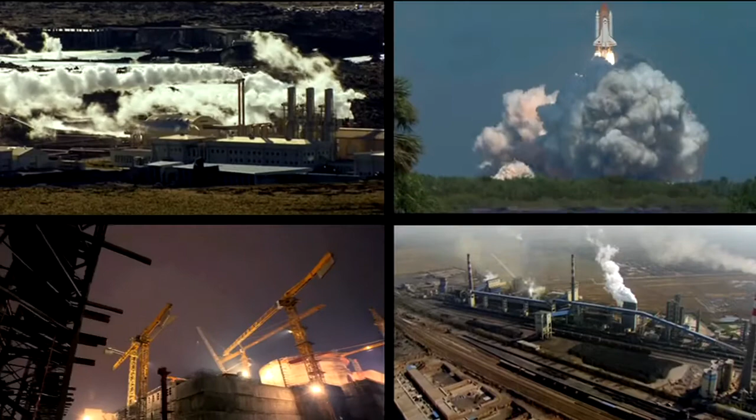We are living in the era of great changes. The power of the human mind has made our life more comfortable, shortened distances, and opened up new horizons. But for the global industry, our era is the time of great challenges.

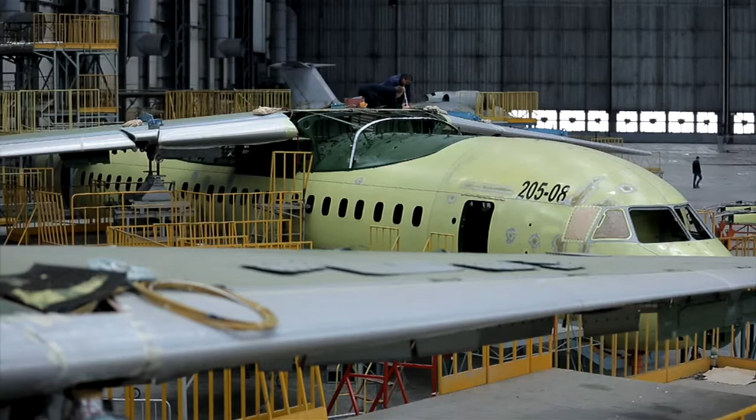The airplane is the fastest and most expensive means of transport. Since the advent of the first aircraft, designers have been working to reduce its weight and make it more reliable, and so reduce the cost of each kilogram carried by air.

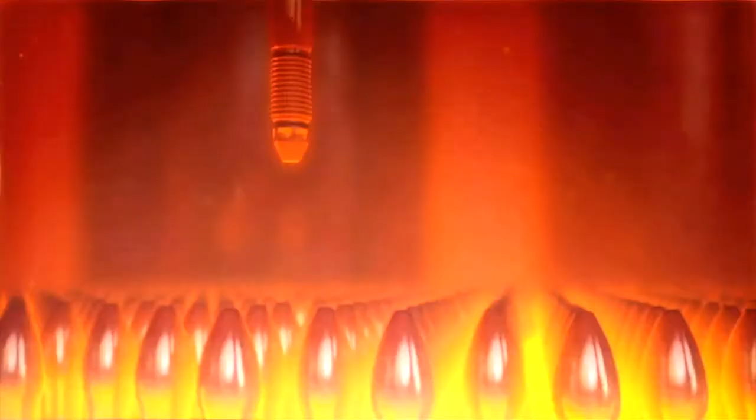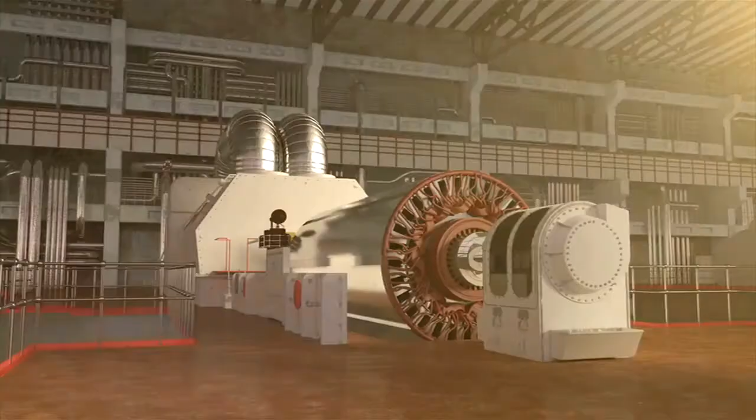Nuclear power is the most promising and cheapest way of generating electric power. However, each structural element of a nuclear reactor operates under conditions of overload and ultra-high temperatures. Extension of their service life and enhancement of their reliability and safety are the main tasks for engineers.

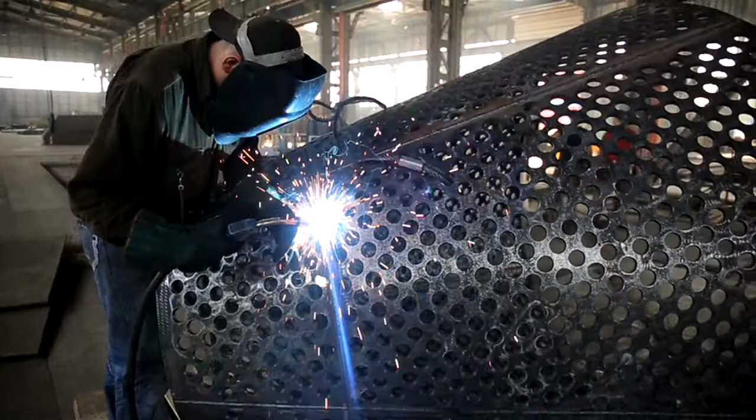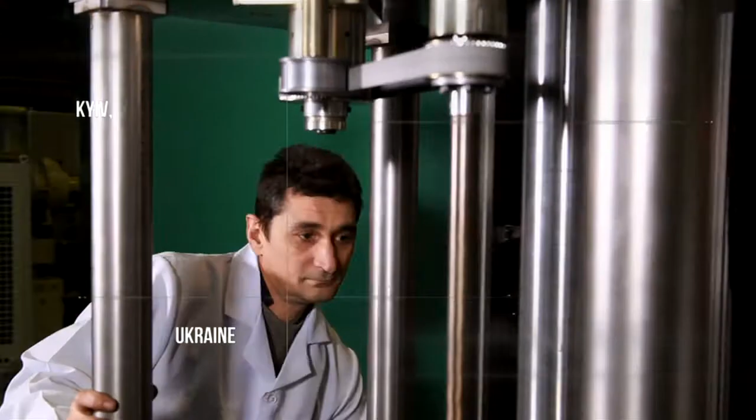Thus, technical progress is impossible without new materials and their new unique properties: ultra-lightness, ultra-strength, and heat resistance. However, the introduction of new materials requires new progressive techniques of their connection. For over 70 years, this field of research has been developed here at the Patton Research Institute of Electric Welding.

The institute was founded in 1934. It employs 3,500 staff. The Paton Institute has sold more than 150 licenses to the United States, Germany, Japan, Russia, Sweden, France, China, and other countries worldwide. Structurally, the institute comprises an experimental design and engineering bureau, pilot production facilities, 3 pilot plants, and more than a dozen engineering centers.

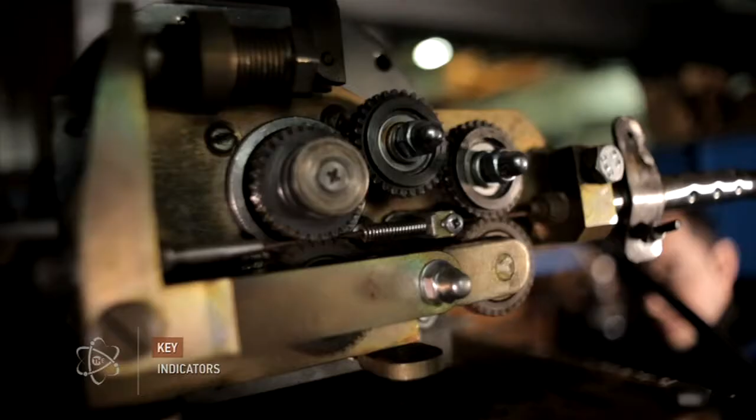The technologies developed by the Patton Institute have served as prerequisites for successful implementation of many audacious global projects, such as forced gasification across the USSR, the world's most powerful weapon, the Satan ballistic missile, continuous welded rail tracks allowing trains to move at 500 km per hour, semi-automatic underwater welding, and welding in the outer space.

Notably, the Patton Institute was one of the originators of electron beam welding, the technology without which nuclear power engineering and modern aircraft, rocket, and engine building industries would be impossible.

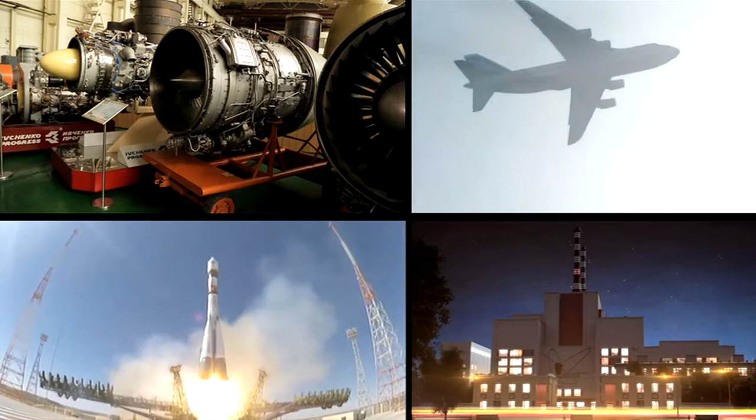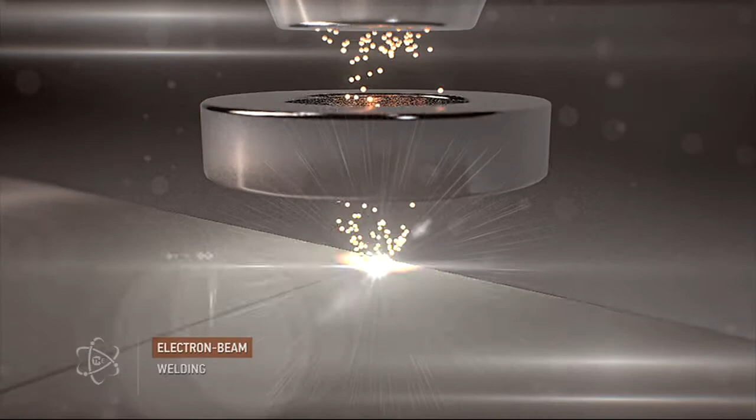How does it work? Electrons are focused into a tight beam and accelerated to ultra-high speeds. When they hit the surface, their kinetic energy is converted into heat, and so metal is heated to high temperatures. As a result, the weld is characterized by large depth and small width.

Electron beam welding ensures reliable connection of refractory, chemically active, and dissimilar steels, as well as high-strength aluminum and titanium-based alloys. Unlike arc welding, this method reduces energy consumption by 10 to 15 times and the fusion area by 25 times.

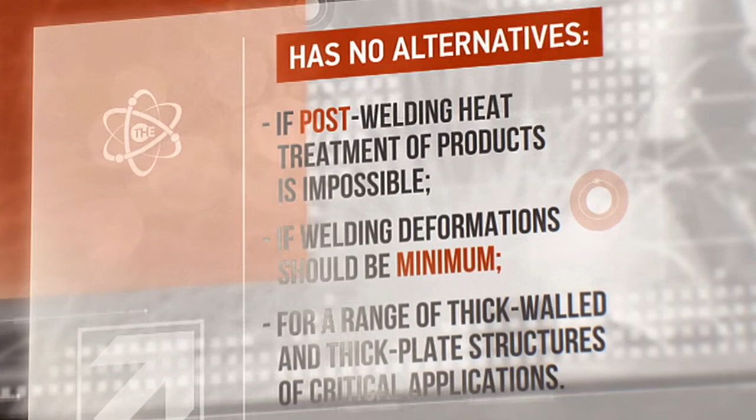Electron beam welding has no alternative if post-welding heat treatment of products is impossible, if welding deformations should be minimal, and for a range of thick-walled and thick-plate structures of critical applications. Making the most of its powerful scientific potential, the Patton Institute develops unique technologies with due regard for individual customers' requirements. Here are just a few examples.

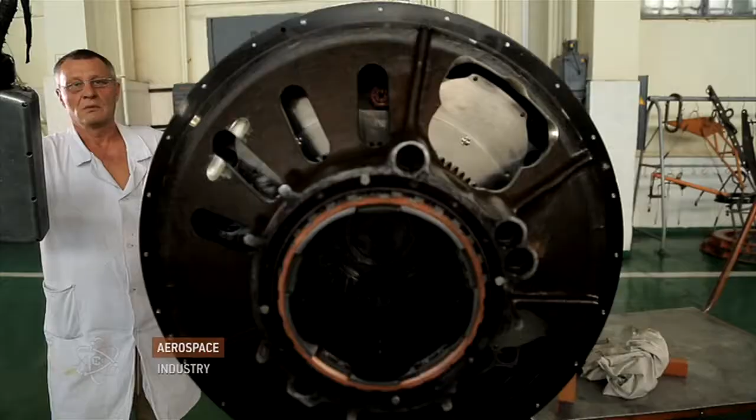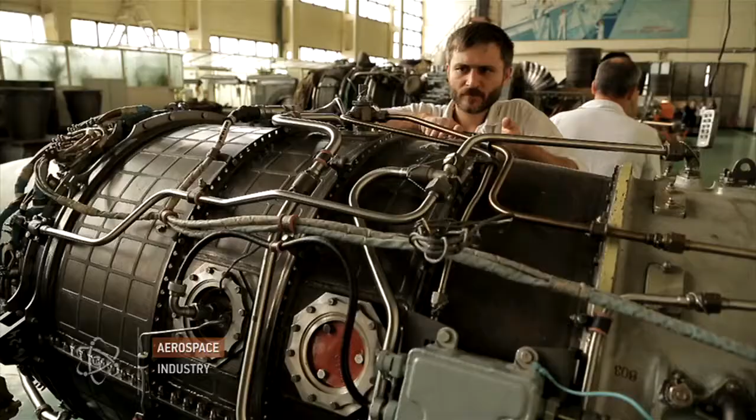The engine is the heart of an aircraft. The manufacturers that offer more economical and more powerful engines win the market. The hotter the gas fed to the turbine, the better these parameters. For this reason, joint connections have to withstand extremely high temperatures.

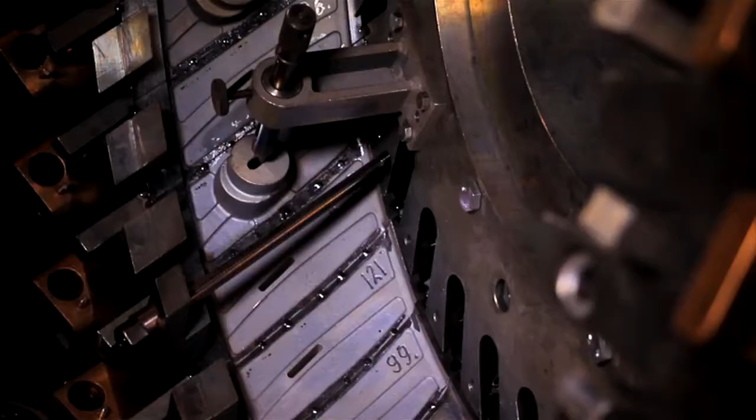In 2014, Patton scientists developed a method to weld the outer part of the casing of the aircraft engine's front intermediate pressure compressor. The customer was Motor Sich, one of the world's leading engine manufacturers. The material was VT5L titanium alloy. Previously, the unit had a cast design, which resulted in high production costs and unstable quality.

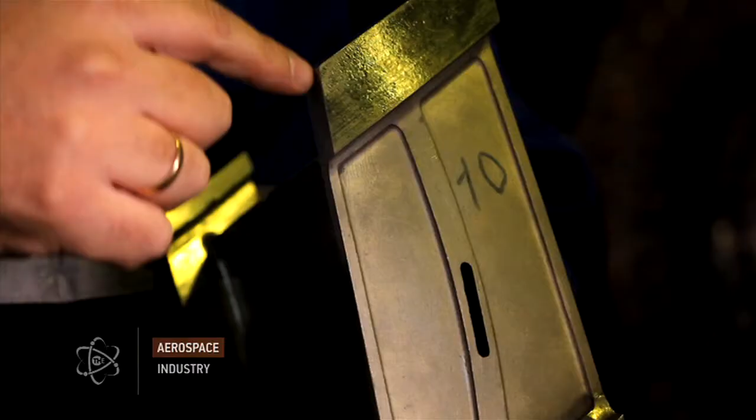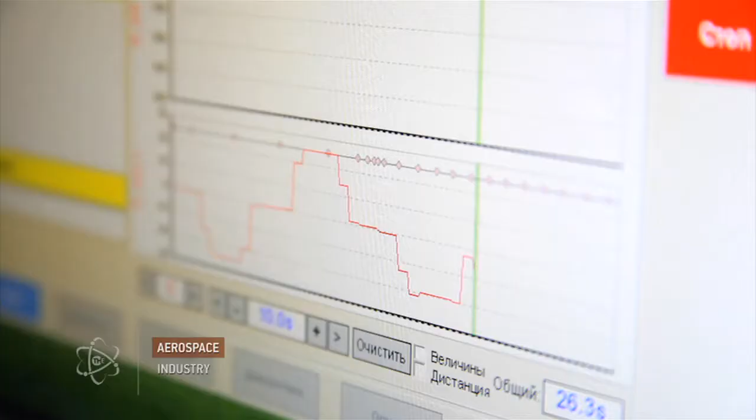The developers faced 2 problems while making the welded structure. 1. Geometrically, the joint was a variable cross-section. 2. The through penetration weld had to be 5 to 25 mm thick and made in one run. Scientists of the Patton Institute found effective solutions to both problems. The process is entirely controlled by special software, and the welding program excludes an operator. The welding factor of joints conforms to the strength factor of the metal body.

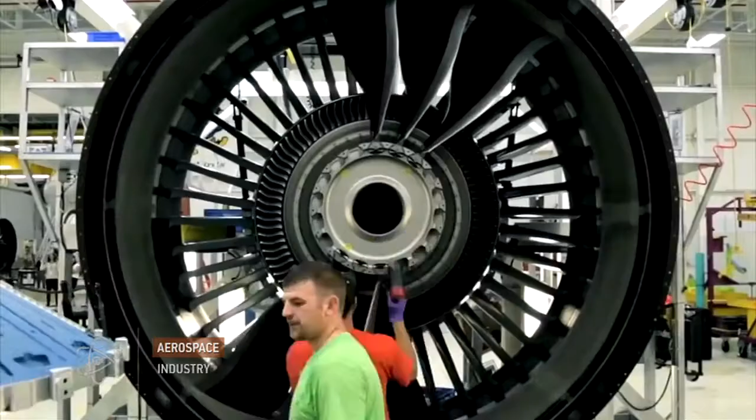The main part of an aircraft engine turbine, the rotating blade, bears the brunt of the heat. The engine's operation fully depends on its strength. And this is about flight safety. The Paton Institute has developed a method to restore damaged blades by welding in triangular inserts. The customer was Motor Sich, and the material was VT titanium alloy.

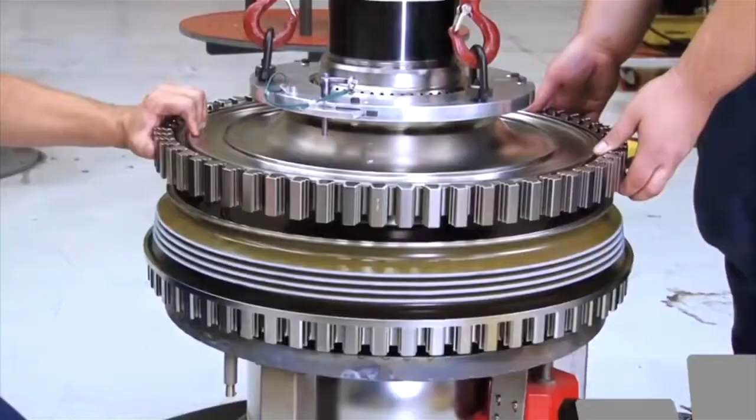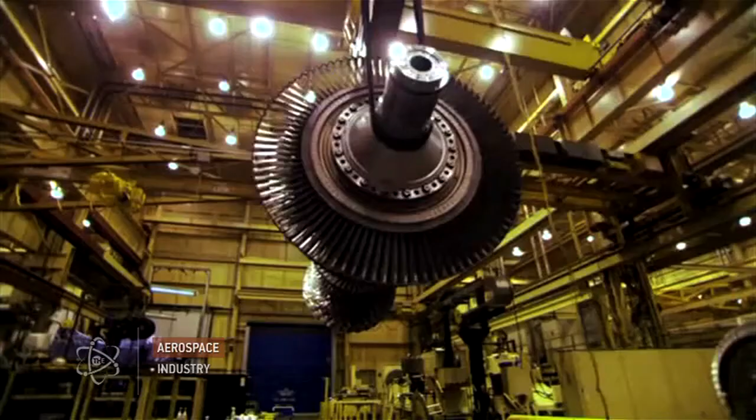One rotating blade costs tens of thousands of euros, and an engine has a multitude of them. Our technology provides for the service life extension of this part by several times. The economic effect is obvious. Currently, a pilot batch of restored blades is undergoing strength tests. After their completion, the method will be applied at the customer's production facilities.

We have developed an electron beam welding method for high-pressure spherical balloons of spacecraft. The customer is the Space Agency of the Republic of India, and the material is VT6 titanium alloy. As compared with argon arc welding, this method minimizes welding deformations, post-welding mechanical treatment, and weld spatter inside a spherical balloon.

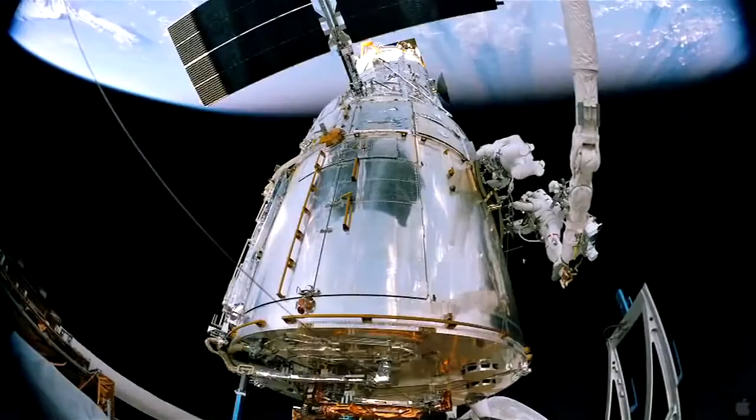Experts believe that the future of the aerospace industry belongs to magnesium alloys, one of the lightest and at the same time one of the most durable types of materials.

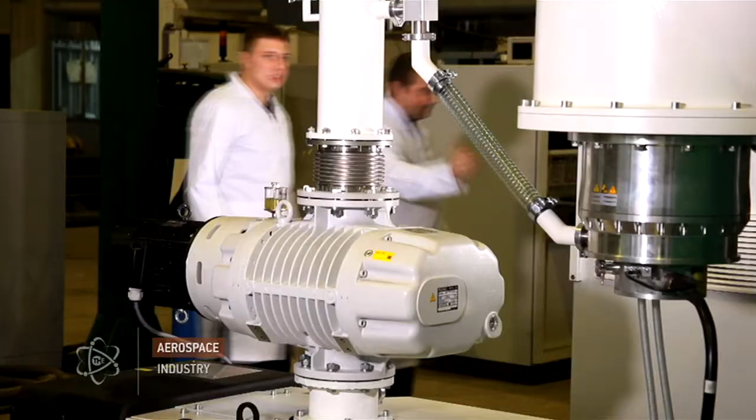However, the introduction of magnesium alloys on a large scale has so far been hindered by imperfect connection techniques. The Paton Institute has developed a hybrid technique for connecting this material. The first stage is friction welding, and the next stage is electron beam welding. Thanks to pretreatment of welded edges by friction stir, cracks and other defects are avoided, and welded joints become almost twice stronger, with their plasticity and impact resistance enhanced as well.

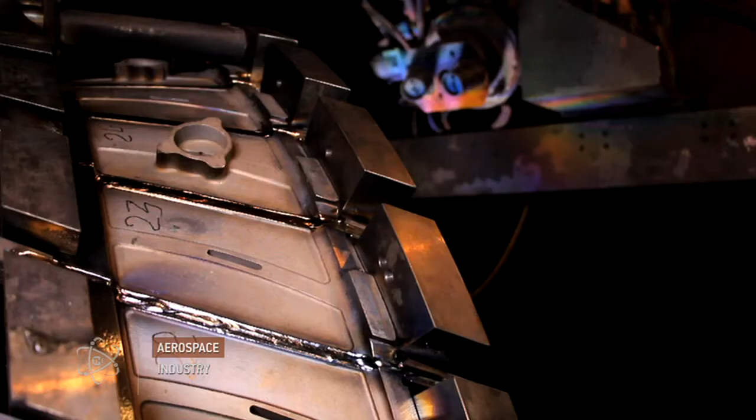This technology has been developed for rehabilitation of intermediate casings of aircraft engines by welding in a 6 mm thick rectangular insert in the damaged area.

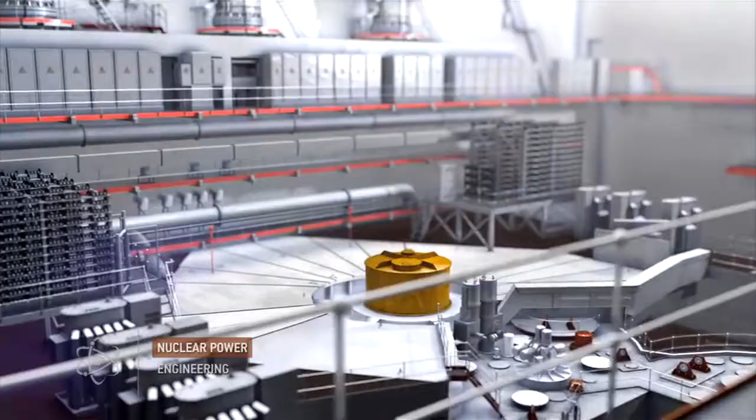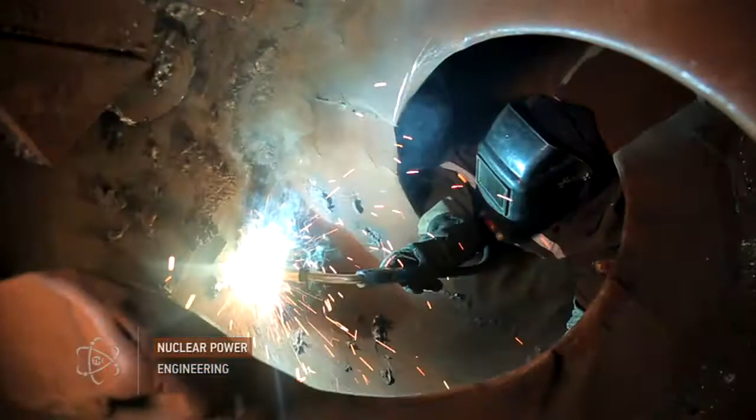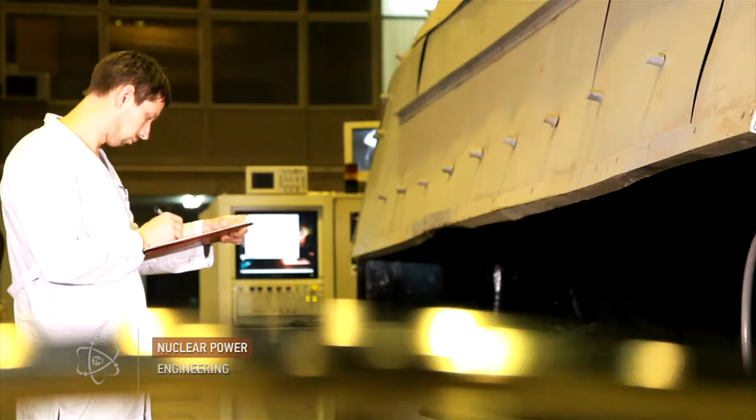One of the most challenging aspects of the global energy industry is reliable connection of thick-walled structures like walls of a nuclear reactor. At present, walls thicker than 40 mm are connected by a multi-layer weld, which sometimes takes up to 100 runs. This technique requires multi-step preparation and significantly increases the likelihood of weld defects, which subsequently affects quality and performance. The Paton Institute has developed a new technique to solve this problem.

The customer is the Russian public holding company Izhorsky Zavody, the only CIS manufacturer of equipment for reactors of the so-termed nuclear island, as well as for reactors of the petrochemical industry. The material is chrome molybdenum steels. Owing to 90 kilowatt beam power, materials up to 200 mm thick can be welded together in one run. This is a unique achievement, yet unsurpassed by any manufacturer of welding equipment.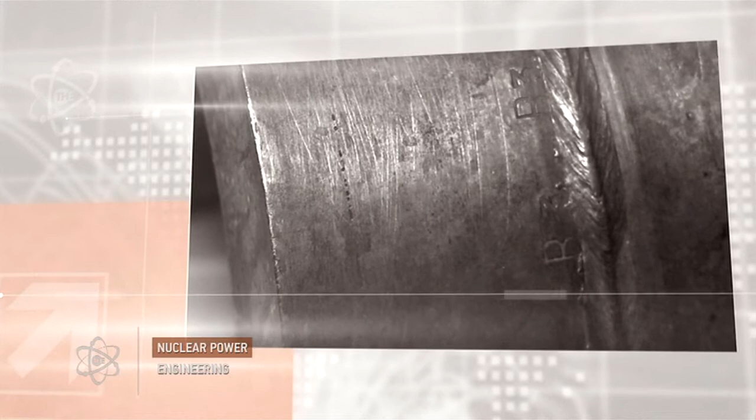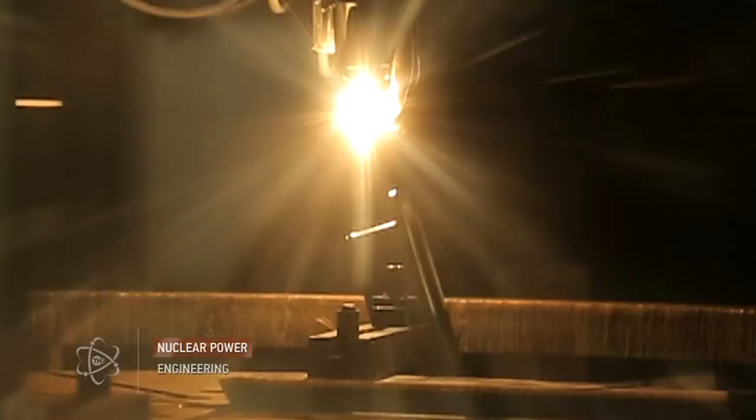Comprehensive studies have confirmed that the weld is as strong as the metal body. Using this method, the customer is able to skip several preparatory stages and cut the time of welding by several times, thus significantly improving weld joint quality and increasing productivity.

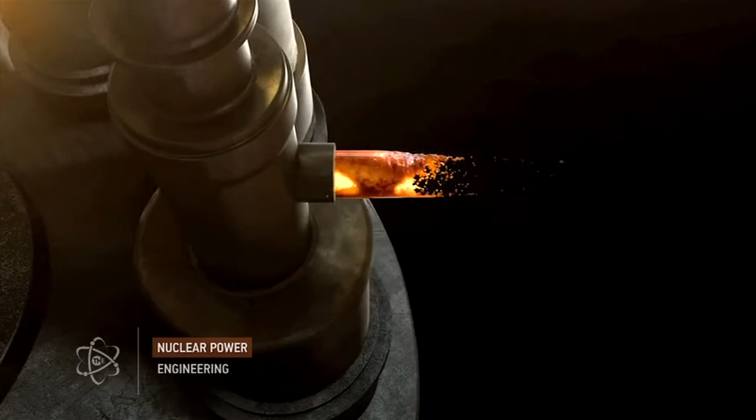A heat exchange unit is the key element of a nuclear reactor. Because of colossal pressure in the tubes reaching 10 megapascals, water does not boil at 270 degrees centigrade. High radiation adds to the most extreme wear conditions.

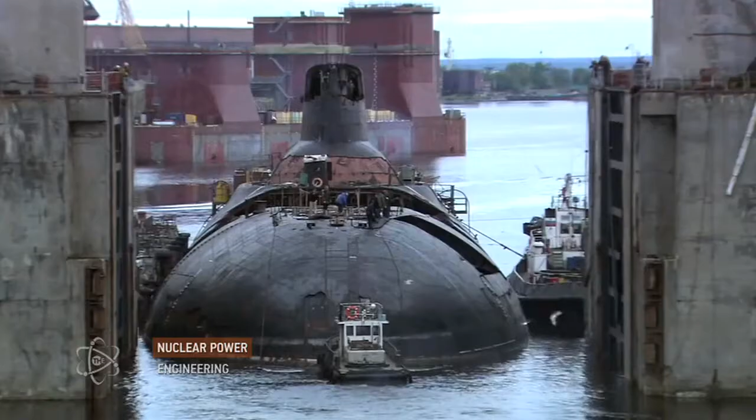The Paton Institute has developed an electron beam welding method to connect the heat exchanger walls with multiple tubes. Unlike traditional argon arc welding, this method doubles the penetration depth and the unit's service life. The welding proceeds automatically according to a preset program. This method has been successfully applied in the construction of nuclear-powered vessels.

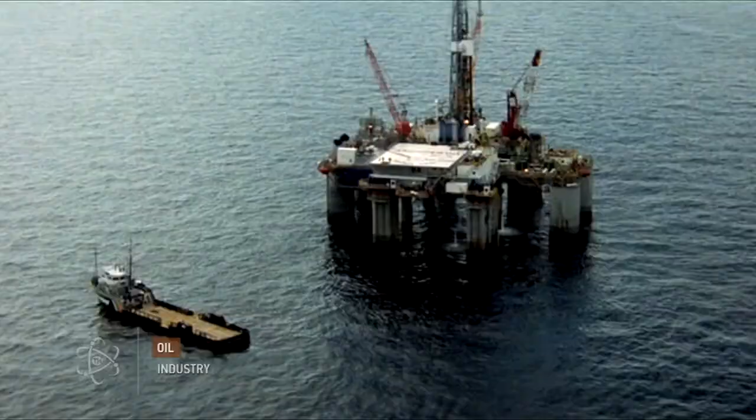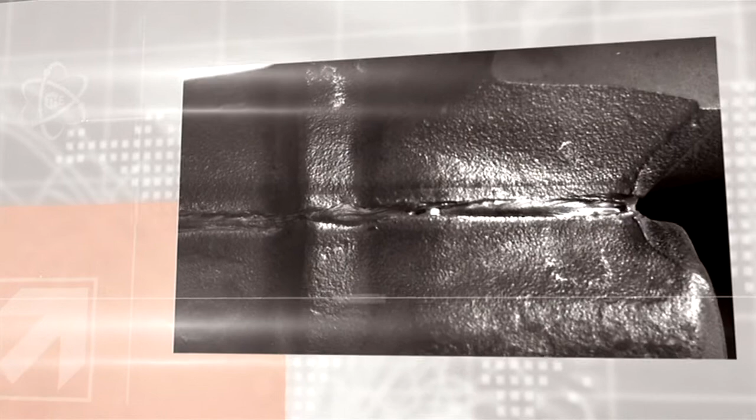The energy crisis forces humankind to search for and develop new oil and gas fields, and here the main task for engineers is to extend the service life of drill bits. They consist of 3 vertical case segments made from medium alloy high-strength steel. The traditional method of successive welds did not allow for the regular geometric shape of the drilling bit. As a result, its service life and performance characteristics reduced.

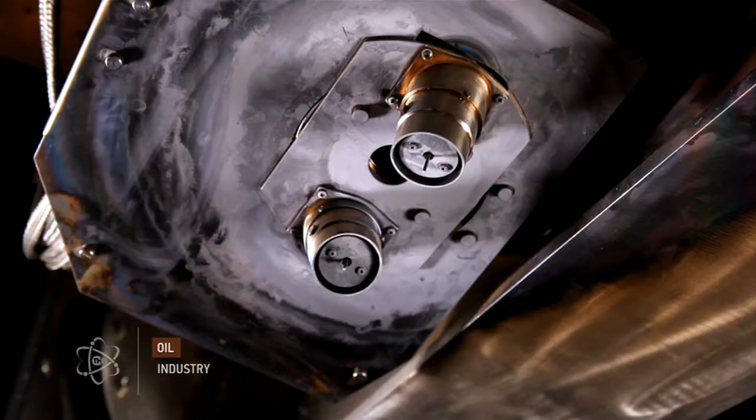The Paton Institute has developed a method of simultaneous 3-joint welding by 3 guns. As a result, output capacity has increased to 5 items per hour. Using this method, the customers have not only increased their outputs by several times, but have also increased considerably the end product's economic efficiency. This technology has been successfully applied at Chinese factories for more than 5 years, allowing them to put out products with higher added value.

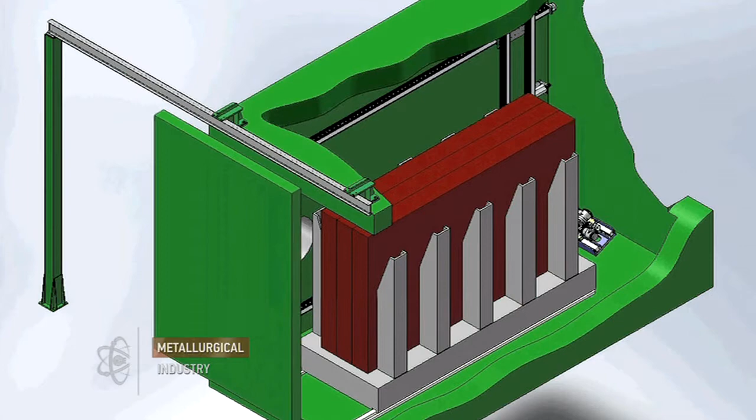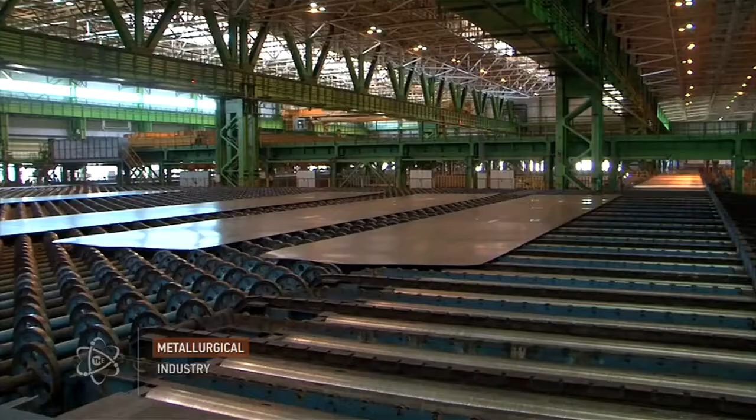Scientists of the Paton Institute have developed a slab connection method for the metallurgical industry. The customers, a pool of integrated iron and steel works in China, needed to increase the thickness of their slabs from 20 to 40 millimeters. However, they were limited by the rolling mill's capacity. Traditional welding methods did not allow them to obtain homogeneous material because of cavities with air forming inside.

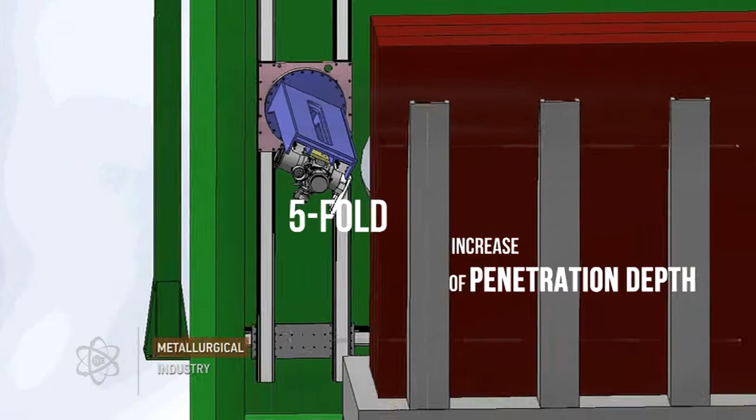Electron beam welding takes place in vacuum. At the same time, penetration is 5 times deeper than in arc welding. This ensures homogeneity of metal during subsequent rolling and the output capacity of 1 item per hour.

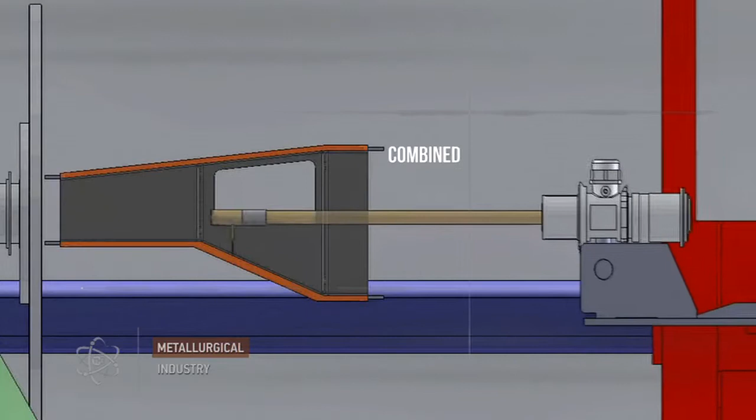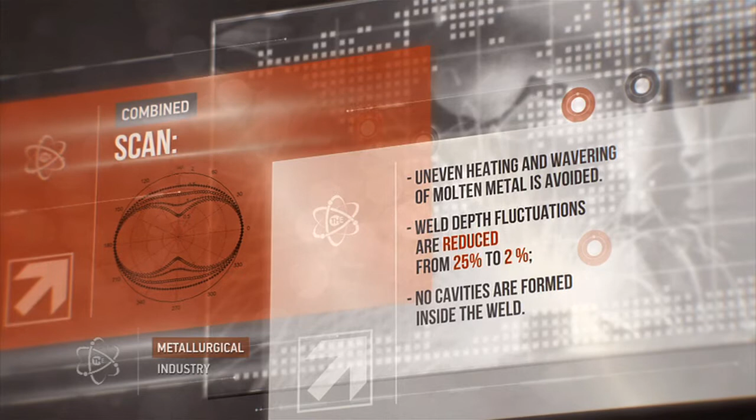The Paton Institute successfully applies combined electron beam scanning: wave, circular, etc. This helps to avoid uneven heating and ripple of molten metal. As a result, weld depth fluctuations are reduced from 25% to 2%, and welds have no cavities.

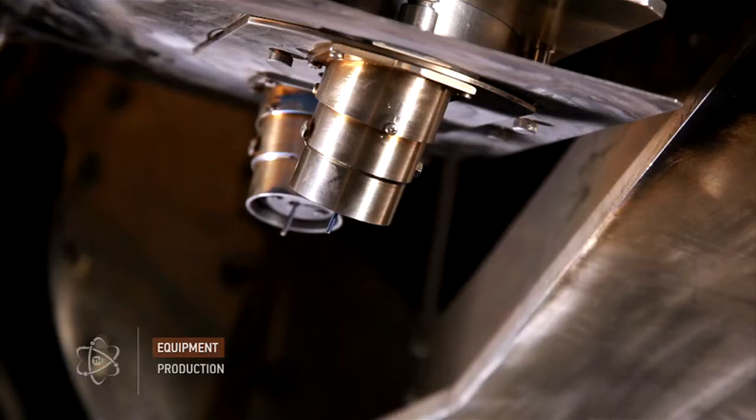The Paton Institute has been developing and manufacturing electron beam welding equipment since the 1960s. What are the unique advantages of our equipment? Our welding units have the smallest guns in the world, so firstly they weigh less, and secondly the gun moves faster, increasing the unit's efficiency.

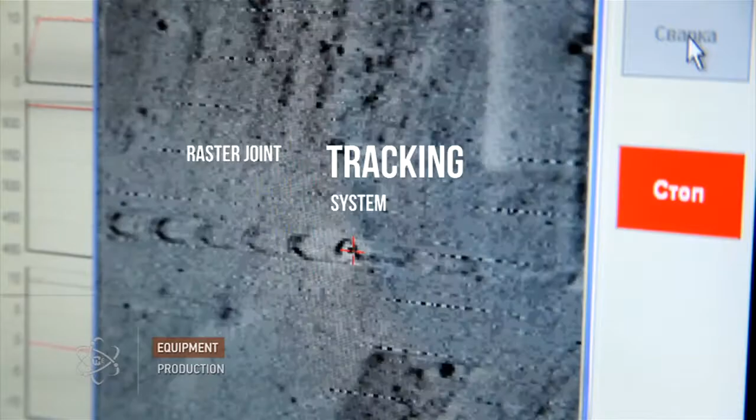The welding electron beam is monitored and controlled by the raster joint tracking system. The gun reads the weld geometry, even the most complex one, like an electronic microscope, and converts the obtained data into a mathematical model. The human factor is excluded completely. At the second stage, raster analyzes how the material behaves during welding. The system scans the weld additionally and adjusts the beam trajectory.

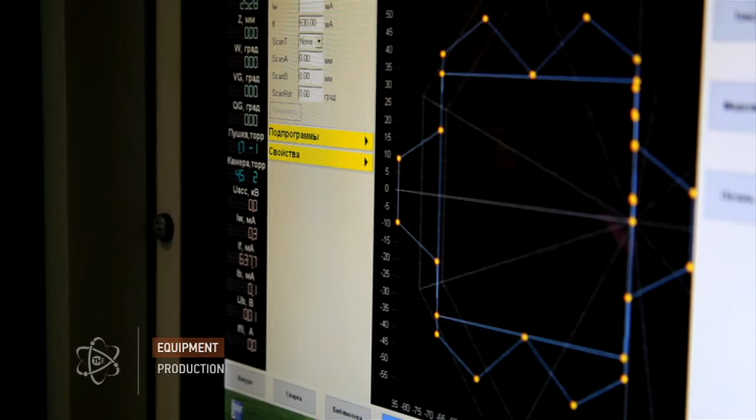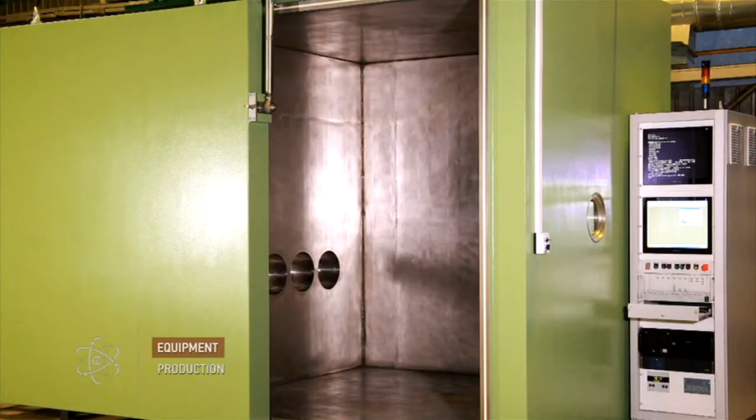Over the last 10 years alone, 57 electron beam welding units with chamber volume from 0.5 to 100 cubic meters have been put into operation. The Institute's customers are such leading machine builders as Boeing, Hitachi, Mitsubishi, Airbus, Turboatom, Motor Sich, Zorya-Mashproekt, and others.

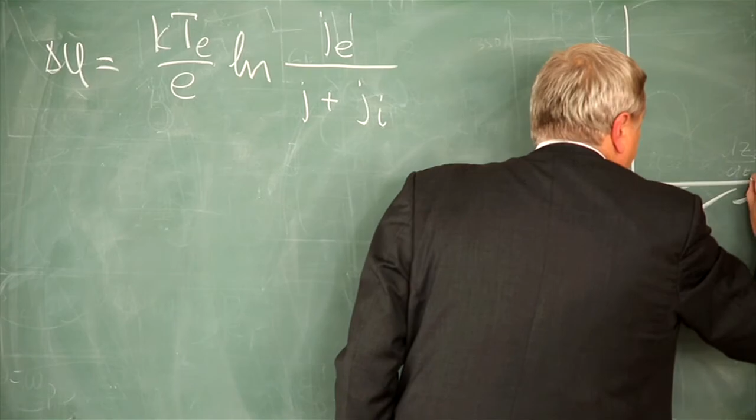So what's the secret of the Patton team? It is a unique scientific school, high-tech production facilities, focus on global projects, persistence, and unprecedented revolutionism.